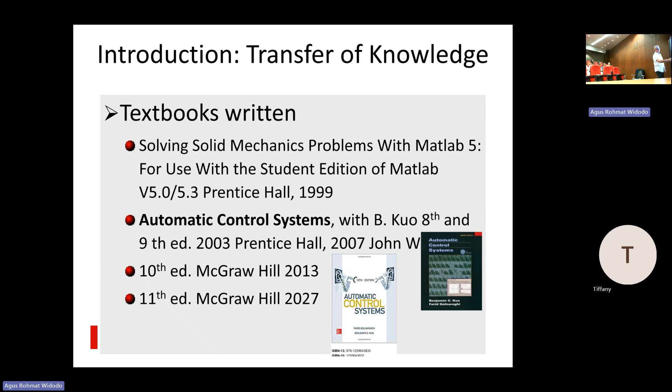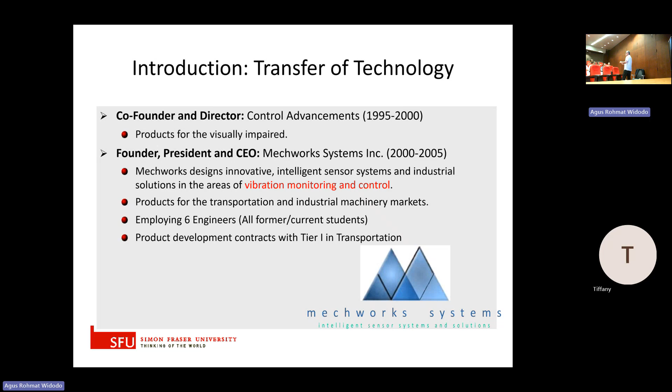But most importantly, with MechWorks Systems Inc., the focus was on developing sensors for applications in vibration control.

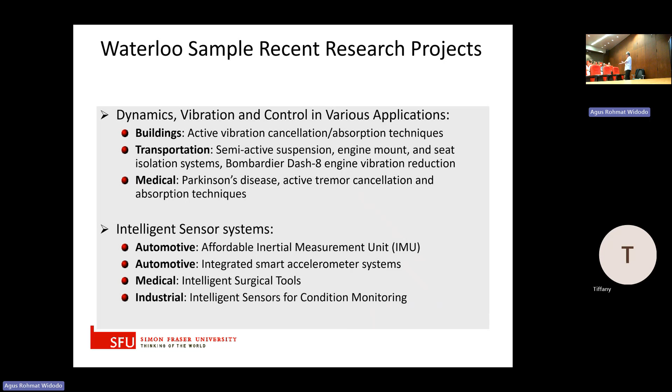So overall, in Waterloo, my focus was on vibration control applied to buildings, transportation systems, trucks, cars, in general vehicles, but I also worked with Bombardier Aerospace on vibration reduction of propeller engines. And I did some work in medical application. I developed a watch, looked like a watch, this was in the 90s, that reduces the tremor associated with Parkinson's disease.

Let me share with you the type of work I used to do. Anything that shook, I could control it. I worked with key companies like GM, General Kinetics, L3 Communications, Paulstra CRC, and Lord Corporation. Lord Corporation is one of the best companies to work with.

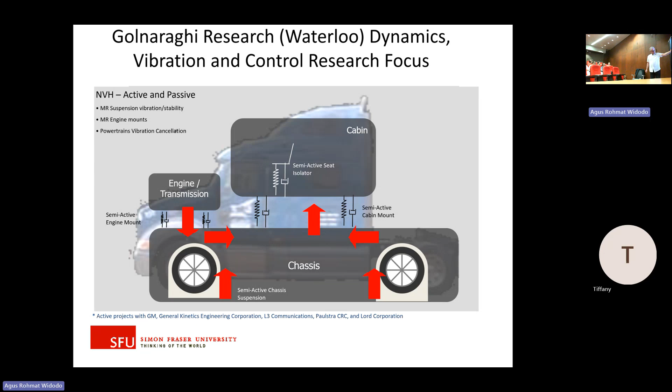They developed the magnetorheological fluids that now are inside dampers used in active, semi-active vibration control. So these are the type of works I did. I developed engine mounts, developed shock absorbers for isolating truck from the road, driver from the truck, and truck from the road. These are the list of companies I worked with, and area of application.

This is something I'm very proud of. This project involved developing active suspension for cars. We were sponsored by GM. I had a startup company that worked with them, and we partnered with another company called Polymer Technologies. They were into polymers and helping us with developing dampers, etc.

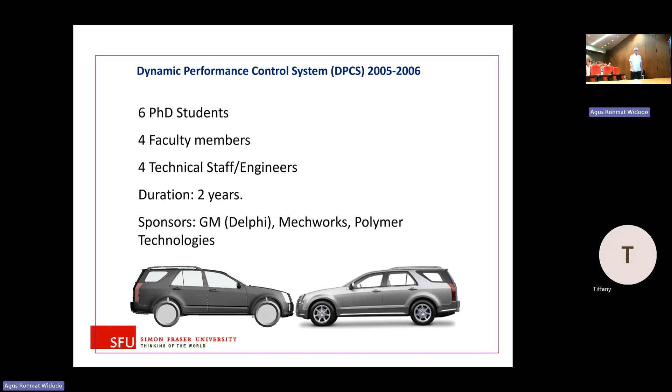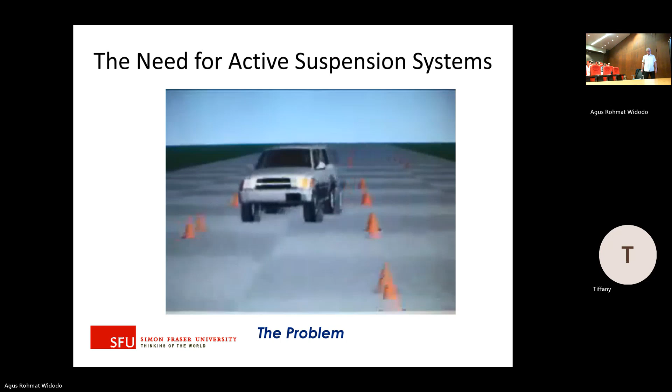And this is an old movie. This is a 2004 research, right? So don't forget, this is 21 years ago. This is a problem. This is a problem we wanted to address, to minimize this type of issue and also address providing ride and comfort, road handling, and improve safety at low cost.

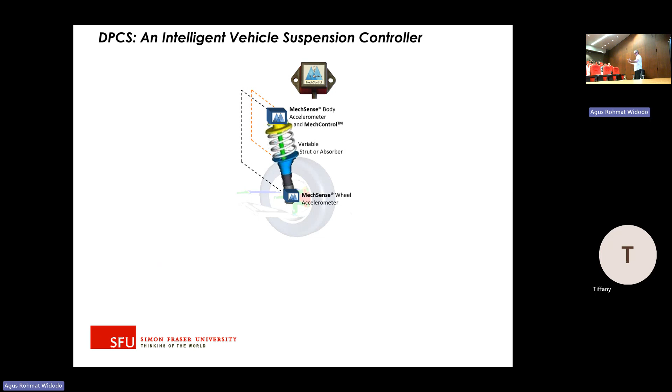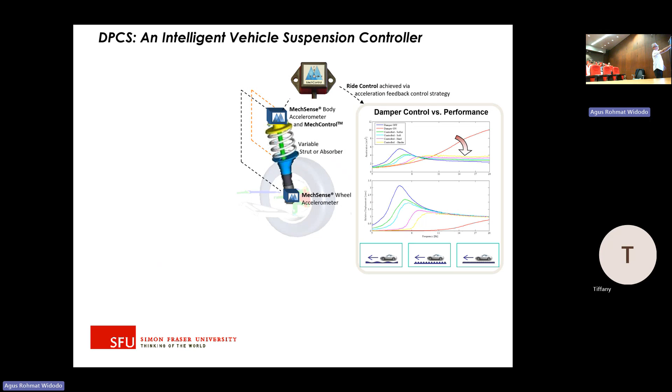So that was a problem. So to do so, from year 2000 to 2004, we developed various sensors. Now, right now, sensors are a lot of them are taken for granted. People go buy a $20 accelerometer or IMU, put it in, and they have built-in Kalman filters to reduce the noise and drift, etc., etc.

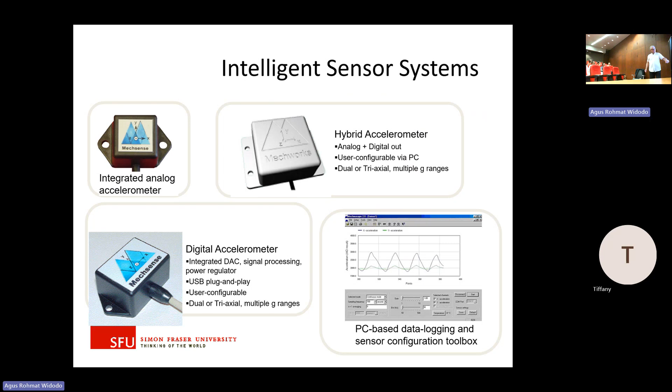None of that existed. So this is pioneering work, in my opinion, because we not only developed hermetically sealed accelerometers, but also we developed gyroscopes. This was the size. Now it's in a chip, but nobody addressed it then. They didn't know how to address the issues of drift and noise, and we did a lot of work with Kalman filters, AI. Now you call it AI, I used to call it neural net then.

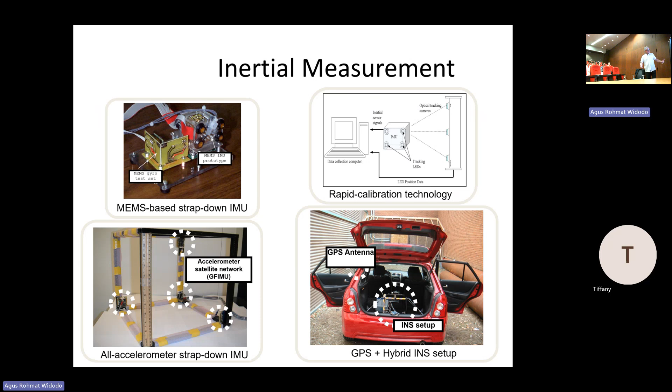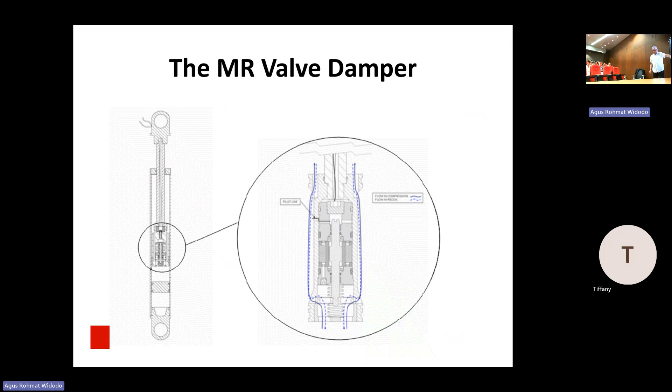To develop the IMU, we were looking at it as a positioning device for tracking motion. We did accelerometer-based IMUs. We tested it in my students' cars, so that's the kind of work I did. But let's go to other work we did. We did a lot of work developing dampers, solenoid valve dampers for Volvo, MR valve dampers for GM, Lord Corporation. We had the test facility to characterize these dampers.

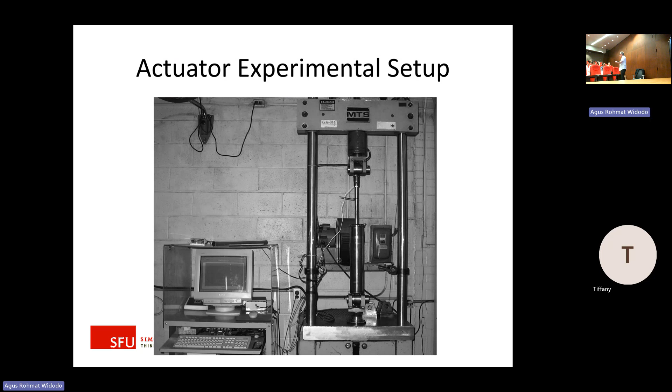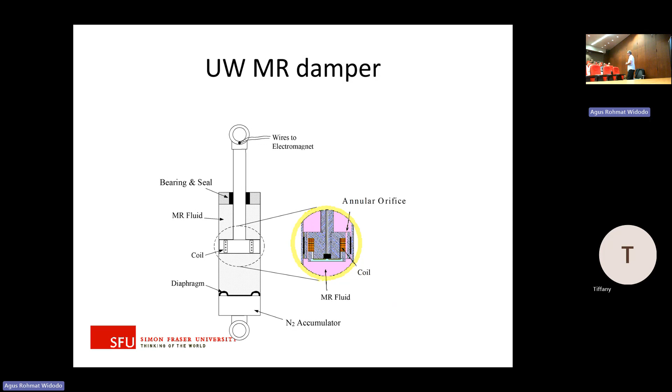This one exploded once, and my magnetorheological fluids are made of iron particles. The whole space was black. It took a while to clean it up. And of course, we called it the University of Waterloo damper that we used for a company called General Kinetics for General Dynamics military vehicle suspension systems. But in this case, we used the MagneRide damper built by GM with the help of Lord Corporation that I worked with.

So the idea was we put this through different frequencies and characterize the performance. Highly nonlinear system. As you know, in control systems, you use DC motors because they're linear. So the control of something using this highly nonlinear system—at the time we only considered using neural networks with fuzzy logic to do that.

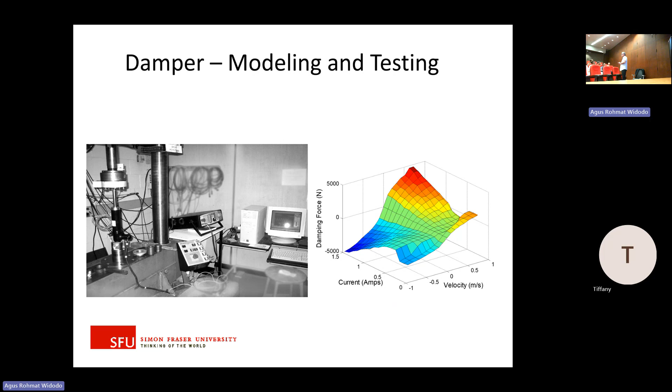So once you characterize the damper and develop, working backwards, we developed the sensors. We took one of our graduates' cars and equipped it with these accelerometers, took it to the road and collected data, fed it to a simple model. Then, with that model, the goal was we wanted to do control on the software.

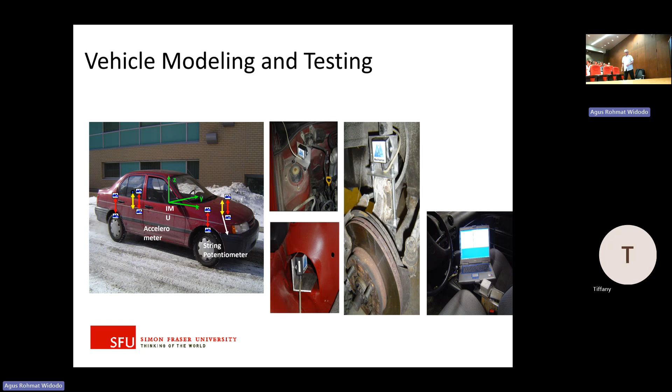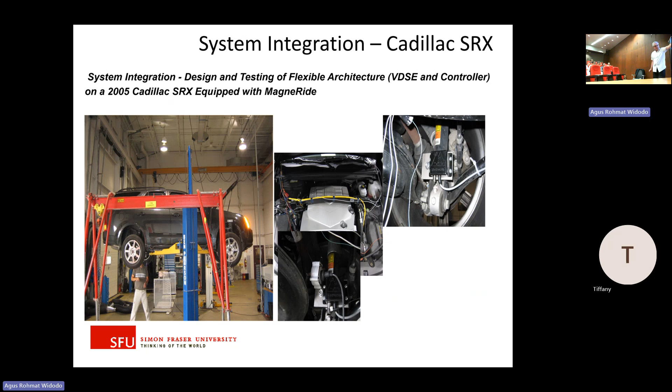Once we were comfortable with this, we got a Cadillac. GM didn't buy it for us, we did it ourselves—we leased the Cadillac, and we used the commercial damper they had developed, characterized it. We equipped the car with our sensors, and then we took it to a partner company to test it on a 4-post shaker.

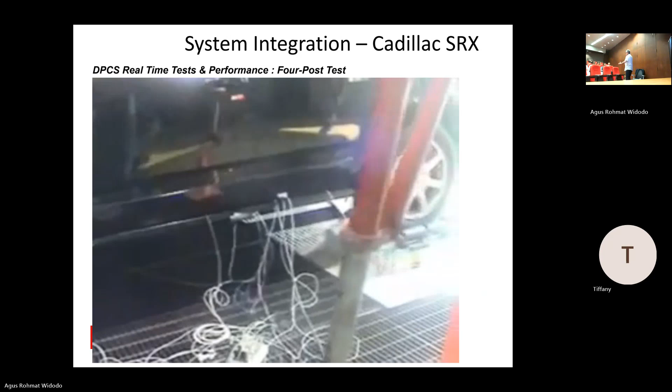A 4-post shaker, as you can see, can simulate road conditions with known road conditions that we used to train our neural network and also fine-tune our mathematical model. You see, they're going to see the different vibrations happening. You see? Good. So different types of excitation were done. This was done in 2005.

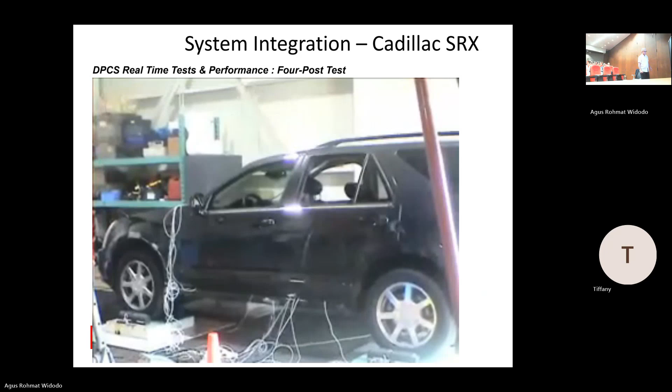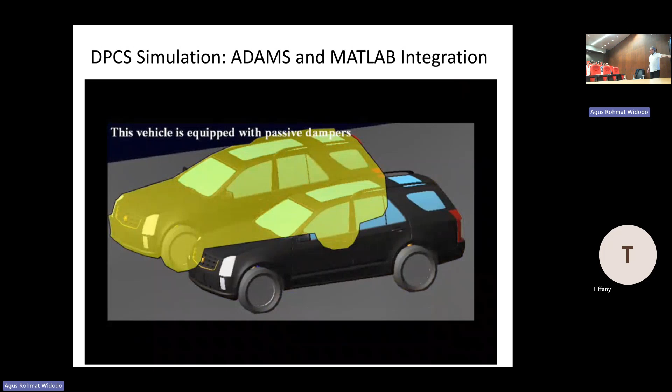Then we used a program called ADAMS at the time to simulate, once you have the model established, to simulate the vehicle, apply our controller to it, and compare the performance. No control, just normal suspension, you see, and with our active suspension.

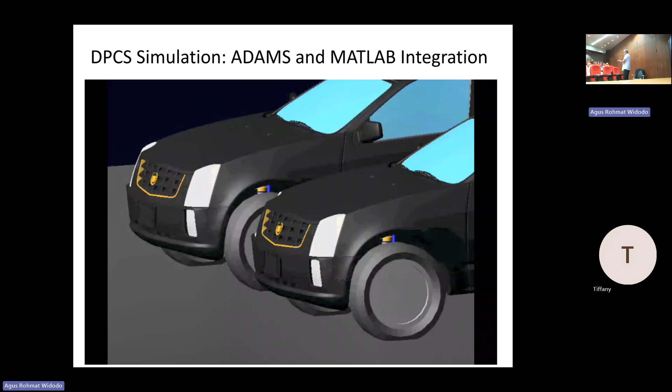So once we were comfortable about our control system using ADAMS software, we can watch this close up. So it goes through a bump, you see, uncontrolled, active control, semi-active control. And the control is done by adjusting the valve, putting the fluid under a magnetic field, right? And adjusting the magnetic field, you create a valve. And that's how you do control.

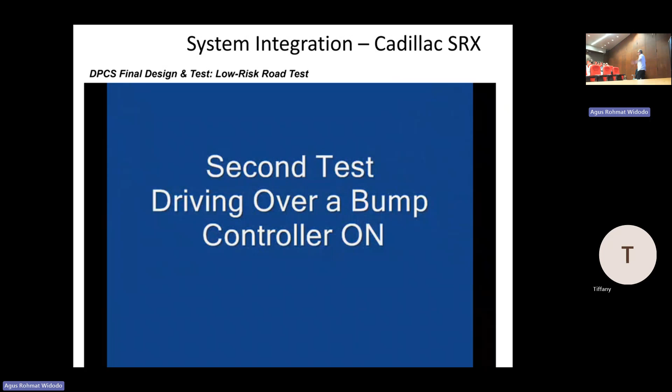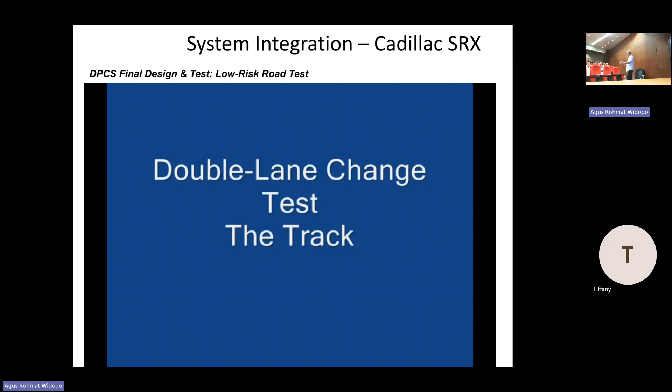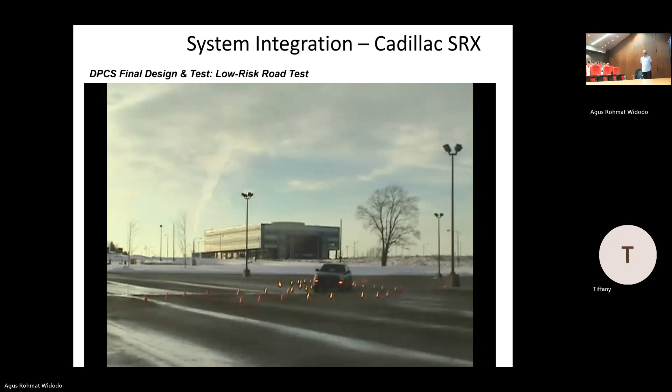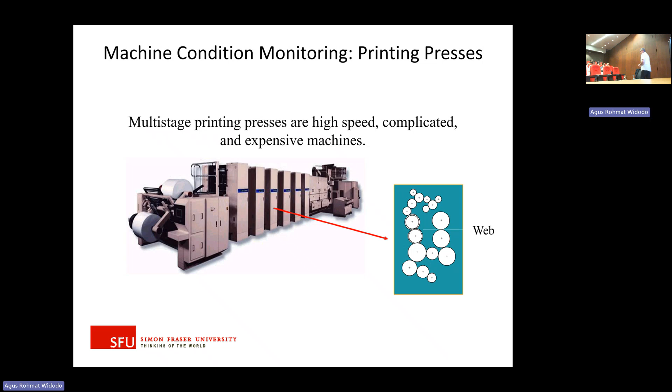I did a lot of work on condition monitoring. I'm not going to spend too much time on this. I'm going to just go very fast. I work on printing presses. Printing presses, if there is damage to the gears or damage to the bearings, there is a doubling problem. Sometimes when you read a newspaper, the colors are off. It's because of these problems. So what we did was,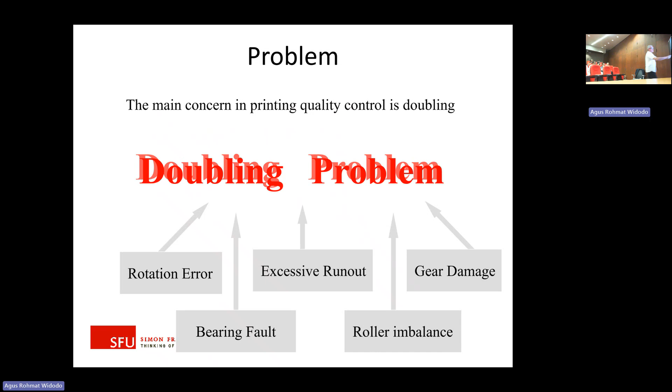that's inside the printing press, 3 stories. So we equipped the different areas around the rollers with accelerometers throughout, and we had our neural net running. We established a clean system, healthy system signature, and through that we could find what was going on, right? So if this bearing, for example, is shot, the operators have a hard time finding it. They do it by hand. They sense the temperature, and then once they find it after a few hours, they have to take this roller out, replace it with a new one, or fix it.

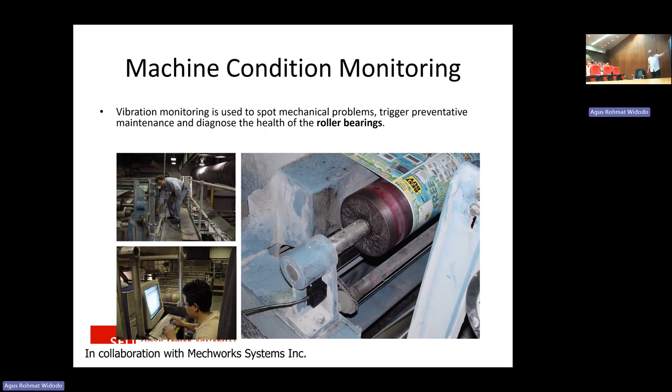So we use a neural net system, collected data, and we were able to identify local phenomena. That's me. Yes. The fumes of ink are very strong.

So I also worked on controlling vibrations of Taipei tower, using a model of it and adding active control. They didn't buy that because they were scared of active technology, so they put in a big pendulum in there. Very, very beautiful. It's a tourist attraction. But I worked with another company doing that.

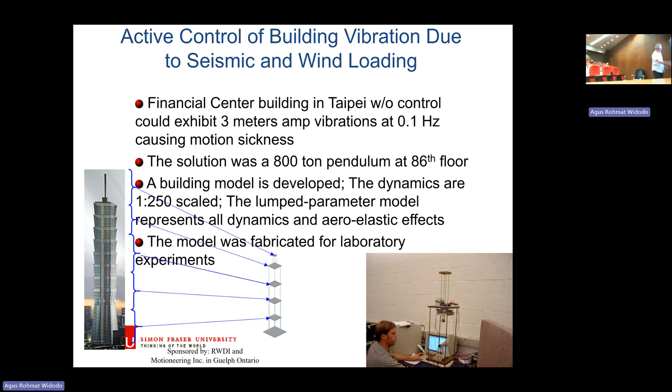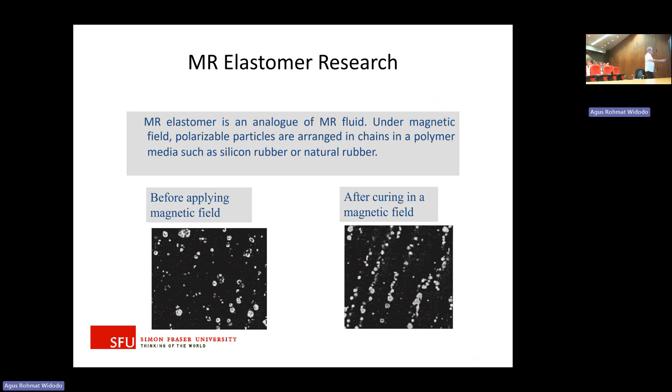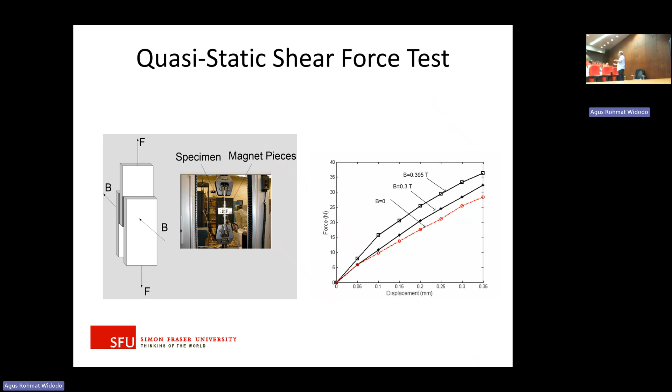I also was involved in developing active elastomers by putting iron particles inside elastomers and curing it in a magnetic field. And then once they are aligned under magnetic field, you can get a change in stiffness. And that's where you can do control, normally for engine vibration. Yeah, so that was a sample of Waterloo work.

Now we enter SFU. SFU is in Vancouver. There's no automotive industry there. Everything revolves around medical applications and startups, and so I gravitated toward the medical side of things, where we developed a near infrared probe that I briefly will talk about, that is used to diagnose breast cancer. I've been working on that since 2010, and now have successfully tested 137 participants at BC Cancer with the goal of detecting tumor in the breast and response of the tumor to chemotherapy.

I have also developed a new MEMS gyro with my colleague, a nonlinear gyro. And that's another leading research I'm doing, to make helmets safer for concussion. I'll briefly talk about that. But also I'm working on EEG research using nonlinear dynamics, phenomena, chaos theory, etc., to do signal processing.

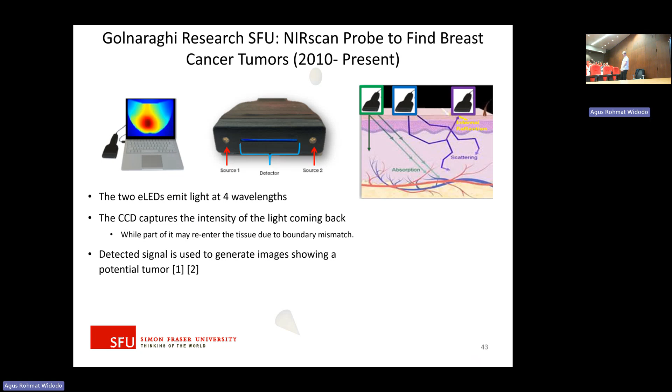And what's going to happen is, so far we spent more than $1.2 million developing it. The highlight of our work is we, in 2022, won an award from the Canadian Space Agency for one of the top 20 innovative technologies in Canada for technologies for space and remote areas. And then BC Cancer also recognized us for this technology. They're very active in research. We work closely with them.

So let me show you how the technology works. We use phantoms. Phantoms, in this case, is a Delrin phantom. Delrin is a material that mimics fat closely. So what we do is we insert a hole in here and fill it with iron. Iron has properties similar to blood, so it is a good way of measuring anomalies. So we go on top of this, we do the different measurements. So we send light, we collect it, and as you pass through the anomaly, you can see, well, by the way, this is based on the theory of light using Beer-Lambert law.

You see it's very noisy. We use AI, we use neural nets, CNN, to make it cleaner. And it's so fast, this is real time. So you see these anomalies changing in real time. So your perspective changes as you move the probe. So we can identify the anomalies. We can actually identify the size very closely. This is depth. We can also measure the depth and this move.

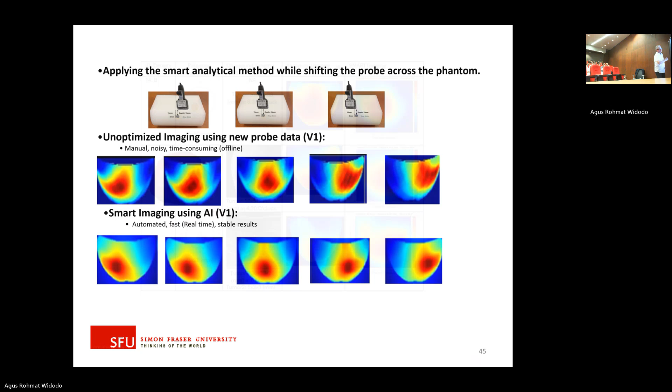And then we had patients tested at BC Cancer, and this shape has to do with the light travel. It's very similar to ultrasound, right? So that's why we don't fill the whole square. But basically, using our imaging algorithm, we could identify the anomalies in patients. We could generate an offline 3D image that matched perfectly with the ultrasound. And furthermore, we could identify dimensions, depth, and width, and that matched very closely with ultrasound. And apply to all of them, right? So we could characterize the tumor.

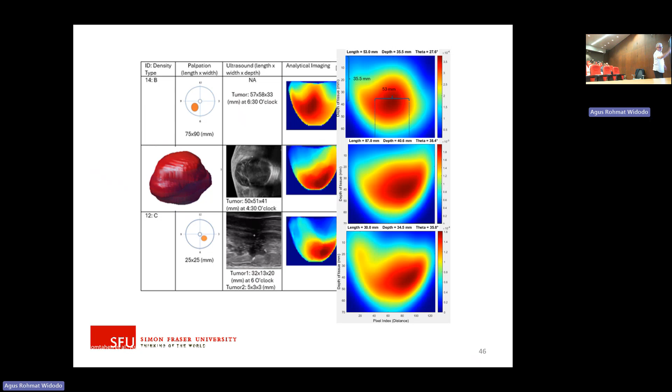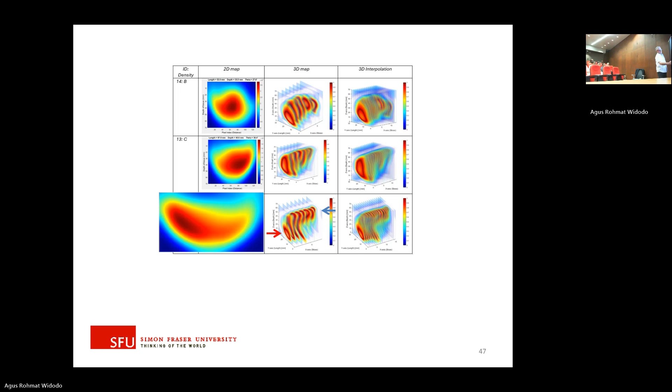With that said, we can do different measurements as slices. So covering the whole area, we can track the size of the tumor in 3D. And this is the type of slice images you see. As you go through the slices, you can see the tumor. And here, there was another tumor. And then using 3D models, we can see how the tumor is shrinking, responding to chemotherapy.

So this is where we are right now with this work. 2 weeks ago, we started the company to spin off the technology. And the idea is to take it forward as much as we can, get FDA approvals, and then work with a company like Siemens or Philips or who has money to take it further forward in the right direction. This technology also applies to vascular issues. We have applied it to fatty liver, kidneys, and rheumatoid arthritis. You can detect inflammation. So basically, based on the absorbance theory of light, we can tell what was there to absorb this light. Is it inflammation?

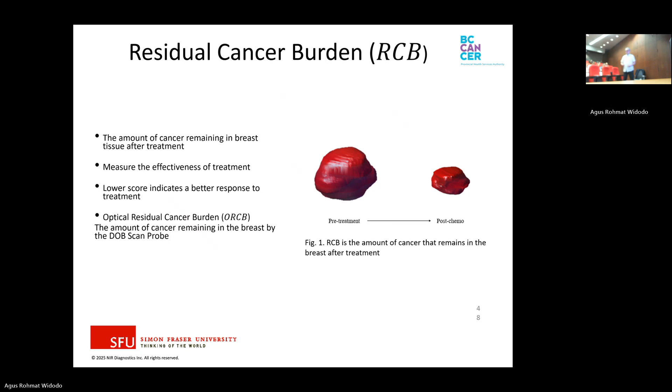Another work I'll very fast talk about. We have made helmets safer for participants in sports, construction. Concussion brain injury does not happen often when you have a direct impact. A lot of times it happens because of sudden twisting of the head, right, like this. So now if you're wearing a helmet, this helmet is tightly attached to your head. When you have a side impact, your head goes with the helmet. The brain inside the skull stays behind. The skull turns, and the tissue in between tears, causes hemorrhage and concussion.

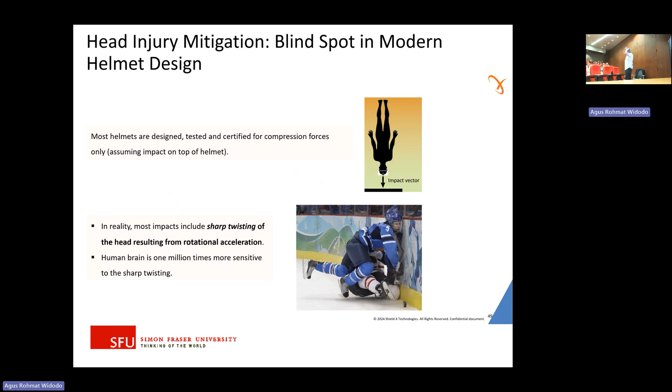Right? So if you want to improve the helmet performance, you better work to eliminate or reduce the friction between helmet and the head. So when the impact occurs, the helmet turns, your head doesn't. Right? So that's the idea. I'll show you. It applies to many areas: occupational safety, construction. We had independent testing. This is not our product, but this is just a picture. We have tested it at Virginia Tech, and we received one of the top scores that they have.

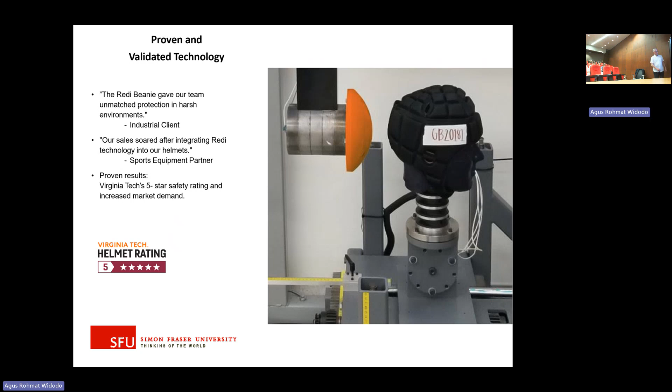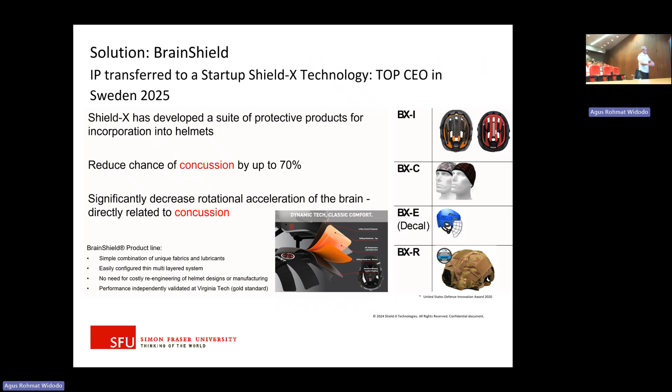So the idea is we use fabrics, multi-layer, nanomaterial, and some lubrication in between that allows this fabric, when you have an impact, to absorb energy while it's sliding, disengaging from the head, and then when it bottoms out, the head goes. Let me show you an image or a video.

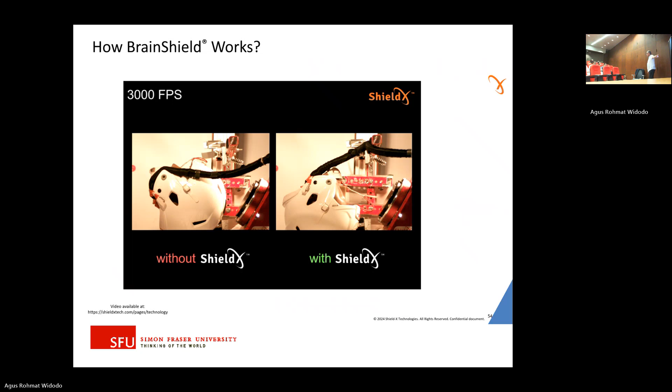This is with football helmets. You see the difference. They're both dropped after impact. With our technology, the rotation of that one is much smaller. So it disengages and reduces chance of concussion. This is mechanical engineering, right?

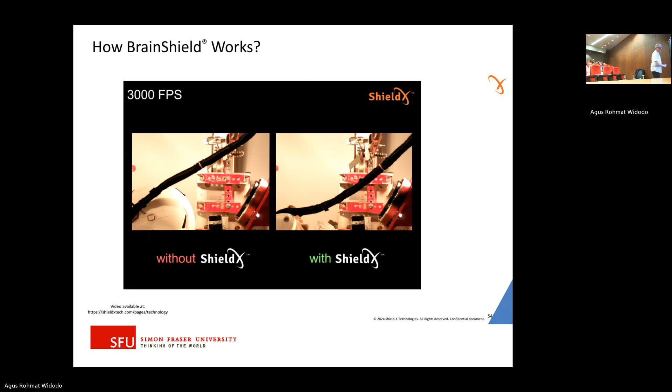Oh, I have this too. I also work on these. One of the main reasons the price of honey, at least in North America, is going up is because bees are getting these mites that essentially eat them up and kill them. Right? So the farmers, and one of our specialties at Simon Fraser is called agri-tech. So some of us do work with agricultural companies or farmers.

We equip a hive with our sensors and monitor the crowd from temperature, movement, etc. So if the hive gets sick, the movement reduces, temperature goes down, the farmer has to go attend to it. And the way they get rid of these mites, they put them in containers full of icing sugar. And they shake it, the mites come off. It's very low technology, right?

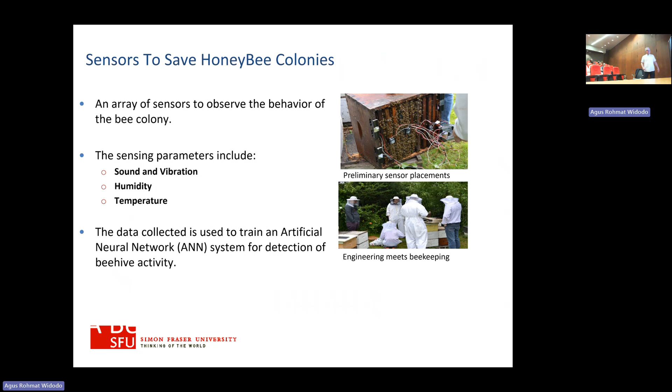So that's what I did. So that's the end of this conversation. So I'm now gonna move on to mechatronics. Thank you. Oh, yes. Thank you so much.

Okay, so the second phase is what I really should have been talking about, and I get excited about my research. So this is what I did since 1988 in the area of mechatronics. So I talked about my research. Again, I'm going to talk about mechatronics at Waterloo briefly, but more focus on Simon Fraser University. And also I want to highlight some of our achievements, namely having to do with the Siemens Mechatronics certification program.

So that's how long I was in Waterloo. This is SFU. I had a Canada research chair there. I became a fellow of CSME, and I moved to SFU as a director to start the school. I ended my term there. It was a very long term, right? And I don't recommend it to anyone, especially you. It really affects you because you deal with a lot of problems all the time, and that's why that book was not written as fast as it should.

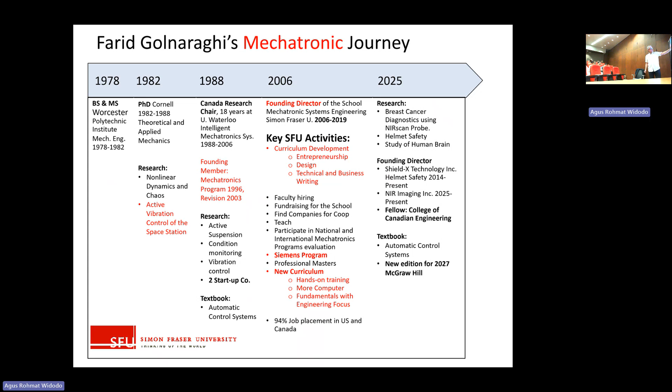Then I moved to Waterloo, and let me share with you the other slide. I went to Waterloo, and I was the only person teaching control systems, but 8 years later, with my group, we lobbied the university so much they finally said, okay, go ahead, start something. So we started a mechatronics option. It was a failure. And the reason it was a failure was collaboration among 3 departments. Each department was teaching their own courses to students from outside the department, and 30% of our students failed.

Every electrical engineering course, they failed 30% because the electrical engineering people were teaching the course to their own students. And if you're in 4th year mechanical engineering, you don't want to know about circuits. You really don't. You don't understand. And electrical engineers, they don't want to know about gears. Right? So that's a major difference. So the idea was, how do we fix the problem?

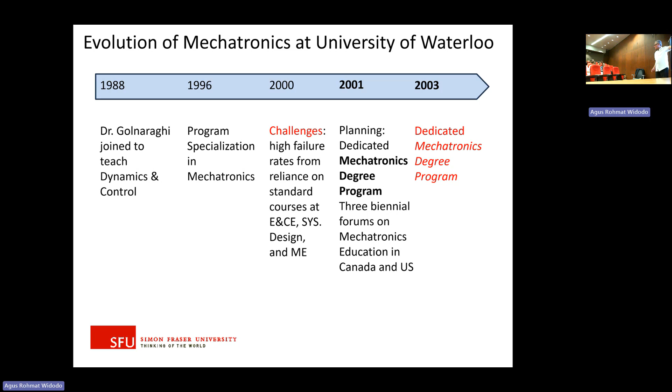To fix the problem, I started 3 biennial workshops on mechatronics, which led to developing a dedicated mechatronics program at Waterloo, 2003. These workshops had one conclusion, and that conclusion is very important if you're trying to establish a mechatronics program, that mechatronics, just like mechanical engineering or electrical engineering, is a culture. And you need to nurture it, what it deserves, and develop courses for it, not use electrical engineering courses to teach mechatronics students and mechanical engineering.

It has to be developed to create new degree programs combining all the necessary items. The key item is design, not mechanical design, overall design, integrated design. All right. Now, of course, you need computer control. But that was the message we got from these events. We had experts from all over the US and Canada coming in to share their thoughts with us.

So we needed this message to convince the university to allocate resources to be able to do this, and they did. We hired 22 faculty members, distributed amongst the departments, but all share the same philosophy, right? We are all mechatronics, not systems, not electrical, not mechanical. We also changed the department name from mechanical engineering to mechanical and mechatronics engineering. So we have 2 degree programs within there, a five-year mandatory program, with 5 co-op terms as well. And the first intake was 100 students.

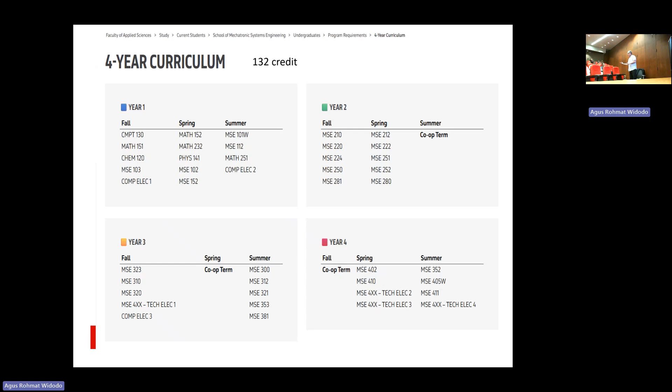What we accomplished was significantly improving our computer hardware and software offering. Particularly in 1st year, we teach them C++ in 130. We teach them digital computing fundamentals, advanced topics in C, another programming course. And in 112, we teach them Python, but embedded programming, so we introduce them to embedded systems in year 1, even before they start taking electric circuits and other engineering courses.

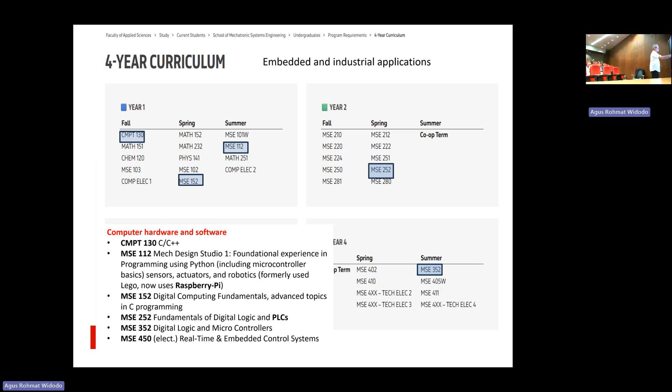Digital logic, real-time embedded control systems. So we added significant computer software and hardware to our program, and significant mechanical engineering focus. We took over Physics 1 and offered it ourselves as statics and dynamics of particles. Mechatronics Studio 2 does 3D printing, teaching them how to 3D print and CAD design concepts, project-based. The standard strength of materials, these are the skeletons of mechanical engineering.

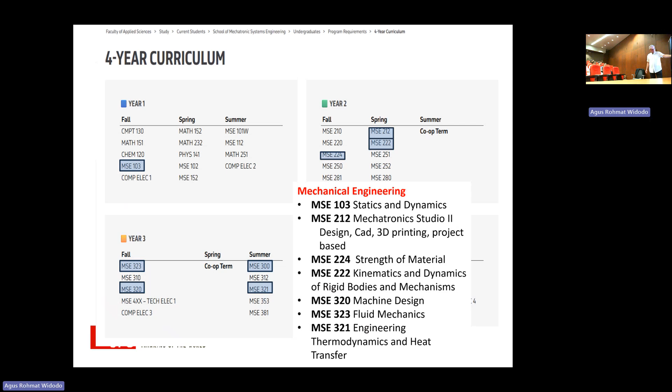Design is also important, especially machine design, because you work with gears and motors, so it's important to know how to design mechanical systems, fluid mechanics, thermodynamics, and heat transfer. We also have significant electrical engineering content, control systems, and real-time embedded systems, with a lot of focus on embedded systems as well.

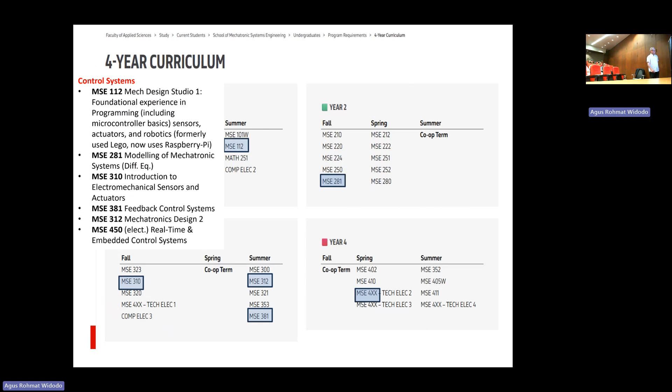One thing we did was take over some of the key courses. Physics was replaced with this course on particle dynamics and statics. Statistics was replaced with Engineering Measurement and Data Analysis, where we teach statistics through experiments - this is a course I'll be teaching for the first time in 1 week. I replaced differential equations with a course called Modeling of Mechatronic Systems. I would love to talk to you briefly about it.

We've introduced the Siemens Mechatronics certificate program that brings really hands-on training for our students. This is a course I'm about to teach by means of experiments, heavy on labs, where I teach differential equations using labs. Anybody taking differential equations from math departments as engineers will agree that it's hard to understand why we need differential equations, so now I start with this second order system.

I pull it, let it go, and I solve it. Then they realize the models they develop actually match the experiment. There's friction in here that the differential equation doesn't teach, so I talk about that. We built our own setup, designed by our students, built by our technologists. Now I look at this and say, well, this is 10 times better than Quanser's system. This costs $750 each, Quanser's similar system is $20,000. It's a no-brainer, right? But I cover everything - the differential equation, Laplace transform.

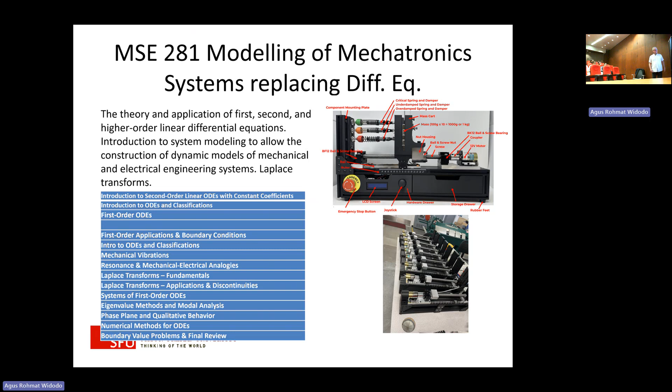So that is, I'll let you know in a few weeks how I did. It's lab-based, 40% lab. Students come in, they do mass spring damper. We have RC circuits, RCL circuits, and we do analogies and numerical simulation, etc. I'm almost done.

There are 3 classes of projects: industry-led, faculty-led, or student-led. All treated the same. Students come in and pick either a proposal from industry, from a faculty member, or their own idea. I teach them, well, they write a proposal without any knowledge of how to write one.

Then I give them a hard time, saying you have to do it this way. First, you have to generate the functional requirements of the system. There are government regulations, there are standards you have to follow, and there's a budget that you have. All that creates the space you have to operate within.

Once you do that, you can come up with 10 designs, pick three, and use the specification to find out which one is best. Then we use the concept known as the decision matrix to choose the right design, and then they present the design. Next term they build it.

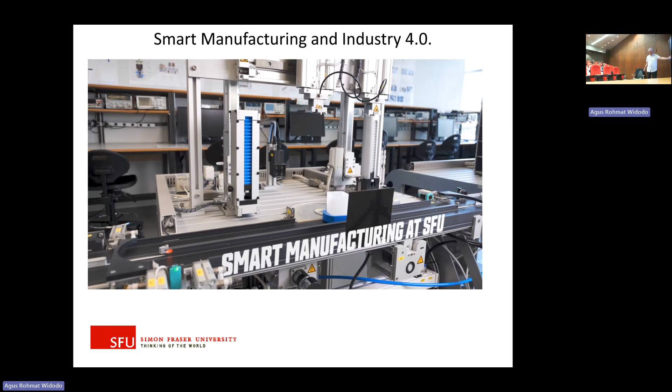And then, following up after I left as director, they continued it with a smart manufacturing professional master's program.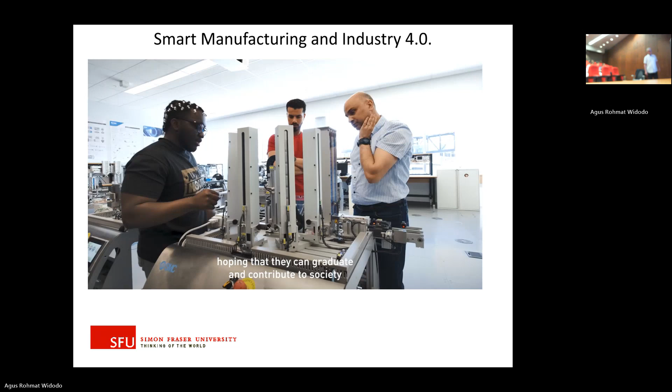All right, so I'm almost done. We have 3 labs: a smart manufacturing hub, an industrial Internet of Things lab, and a digital twin lab, with a highlight of using VR headsets to simulate a factory environment. This is amazing.

I'm done. Those are some thoughts. Sorry for the rush, but I had to cover everything there.

Very nice, thank you. Yes, please. Thank you very much, my pleasure, really appreciate it, John. I just wanted to commend you on your Waterloo Mechatronics team. Oh, thank you so much. I used to be a motion sensor manager at Apple, and Waterloo Mechatronics graduates were our best hires. But SFU's are better now. I know, I'm sure they are. I'm sure they are, thank you, thank you.

My one comment would be that they were very good at getting in and getting the interview, and very hands-on. They missed a little bit when it came to rigor and fundamental understanding, but they were very hands-on. Yeah, I agree, I agree. I 100% agree with that because fundamentals were not as strong at Waterloo. But we teach, even when I teach our own differential equation course, we stress fundamentals a lot because of my own background. I can do many different kinds of research because the basis I have covered, right? So thank you for that comment, I agree with that, thank you.